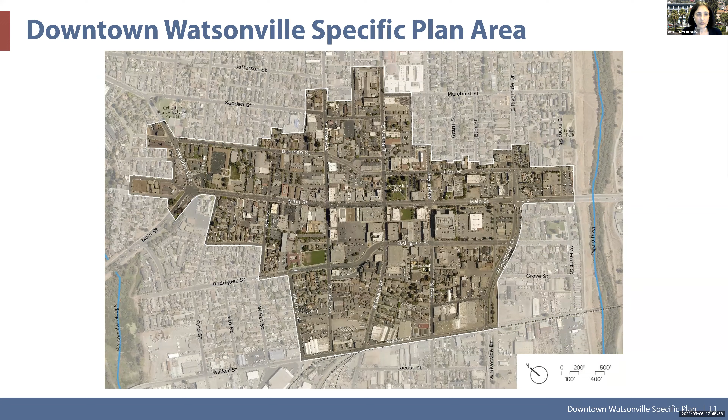Overall, the project is a 2.5-year process. We started in the fall of 2019 and really geared up last year. We've had several advisory committee meetings, and we had a community workshop last fall where we worked with you all to develop vision themes and guiding principles. These themes, which I'll show on an upcoming slide, then formed the basis for the recommendations we are presenting today. The recommendations will be refined with your input over the summer, and we'll be preparing the plan document that we'll bring back to you in the fall for your review and feedback. Then we anticipate going to the Planning Commission and City Council for review and adoption over the winter, early part of 2022.

As I mentioned, over the fall and winter we worked on vision themes and guiding principles that will guide the Downtown Watsonville Specific Plan. The themes were expansive. They included vitality, dignity, equity, preservation, safety, and innovation. With each of these themes were 8 guiding principles identified, which also have strategies associated with them. We had provided these on the city's project page for the downtown plan and asked for comments from the community. Over the earlier part of this year, we received over 100 comments, based on which we made some changes and refinements. What you see here are the final versions of the guiding principles.

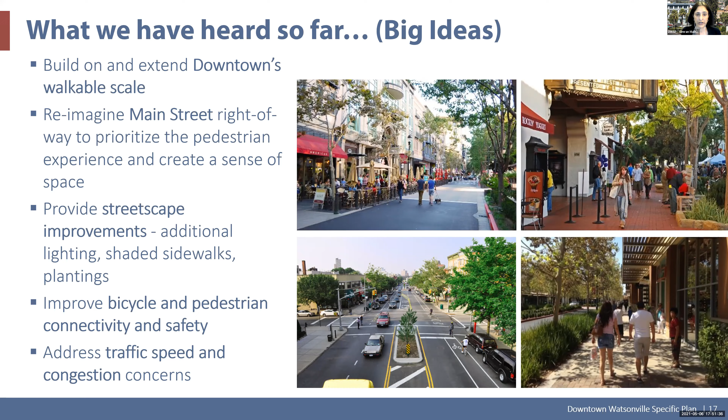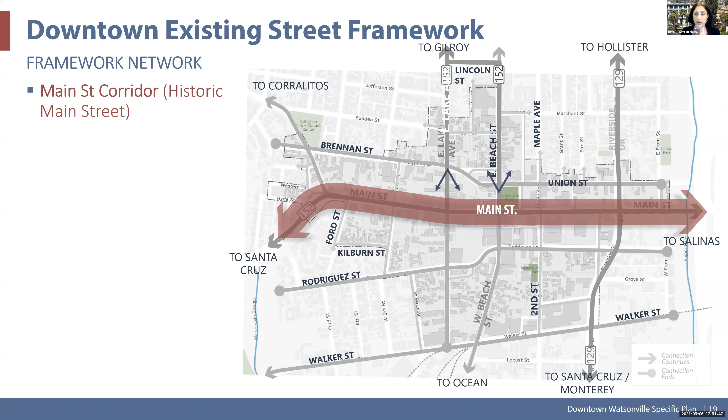So very briefly, to orient everyone on the existing street network and the recommendations for it: downtown is bisected by Main Street, the historic corridor that runs through the heart of downtown. There are several regional connectors that bisect downtown — Riverside Drive, Beach Street, Lake Avenue, and Freedom Boulevard — which connect to larger regional destinations like Hollister, Santa Cruz, Corralitos, and Monterey.

The next layer of streets is what we call crosstown connectors, including the Union-Brennan couplet, Rodriguez, as well as Walker Street. Finally, there's the fine-grained street network of local streets, which covers the rest of the street network within downtown.

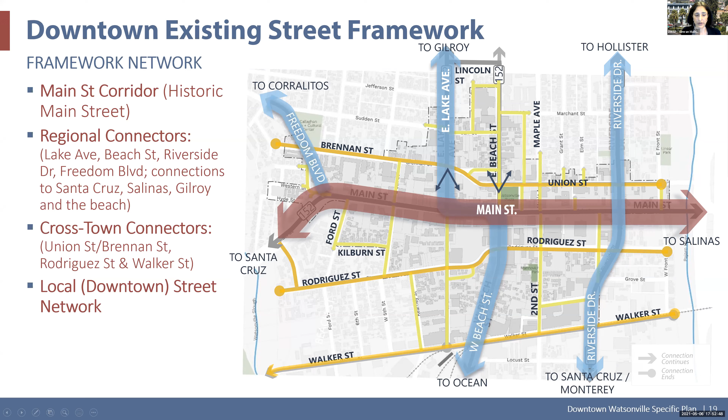There are two Caltrans routes that run through downtown: 129, which is along Riverside Drive, and the 152 couplet, which is on East Lake, East Beach, and Main Street. The fact that there's a Caltrans right-of-way within downtown has an impact on how it functions, and because of that we are making some recommendations tied to that. You'll hear more about that from both Peter and Megan later on.

The second option is to consider Lake becoming a two-way street again, letting both Lake and Beach become two-way streets, with Lake continuing as 152. That allows certain flexibility in how the street is being treated, and we'll discuss that again momentarily.

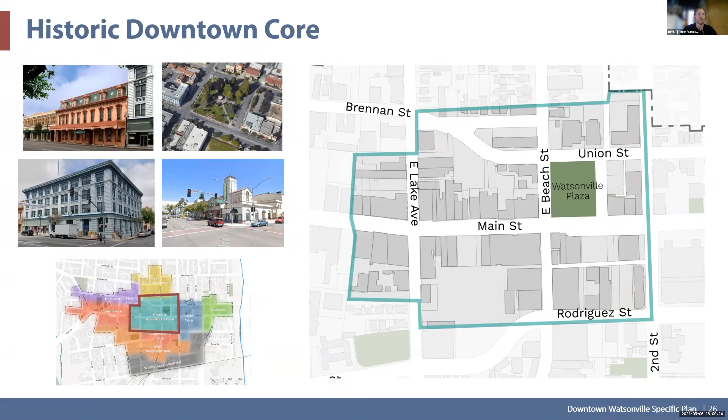So some of the placemaking priorities for the downtown core require that all ground floors of all buildings are very active. What that means is they have active uses that tend to be shop fronts, retail, things that generate human and pedestrian and customer activity, and that there's a consistent unifying streetscape throughout the downtown.

We want to encourage and enable outdoor dining to happen on the sidewalks of downtown, so that businesses are spilling out onto the sidewalks, into the streets. Maintain a continuous and active street wall in the core. Basically, creating a district that is busy and active and fun, 18 hours of the day.

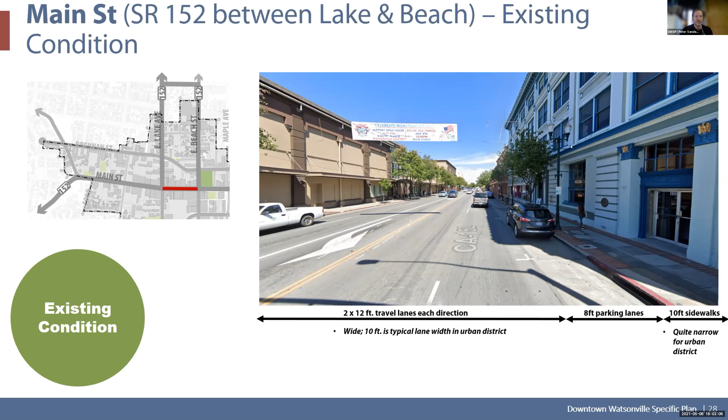So how do you do that in downtown? This is an existing conditions image of Main Street, basically at Main and Beach. As you can see, the street itself is very wide, the sidewalks are very narrow, not particularly conducive to a lot of pedestrian activity out in front of the businesses. You can kind of see where the existing parking lane is, that probably used to be a wider sidewalk. When this became a Caltrans route, the street was likely widened to add parking at the expense of the wide sidewalks that were there to support the businesses.

So, in the examples that Simran was giving, some of the alternatives that we're exploring with Caltrans in terms of potential either rerouting of the route, or on this particular stretch of Main Street, we think there's actually an opportunity to lose a lane in the northbound direction, because it's not actually part of the Caltrans loop. We'll get into the details of that later on, but what that means is a big opportunity in the core we see is there could be an opportunity to gain back some of the space that has been lost to vehicular traffic. That could happen both in short-term, more temporary types of improvements, and those could be formalized in the long term to permanent improvements.

So what we're looking at here is basically the option to reduce a lane in the northbound direction. So you'd have 2 travel lanes heading southbound, 1 heading northbound.

What that would get you would be basically widened sidewalk areas. So the colored stripes you're seeing here are what we call tactical urbanism. Basically, it's using paint and planters, removable furnishing in the street itself to basically extend the functional space of the sidewalks.

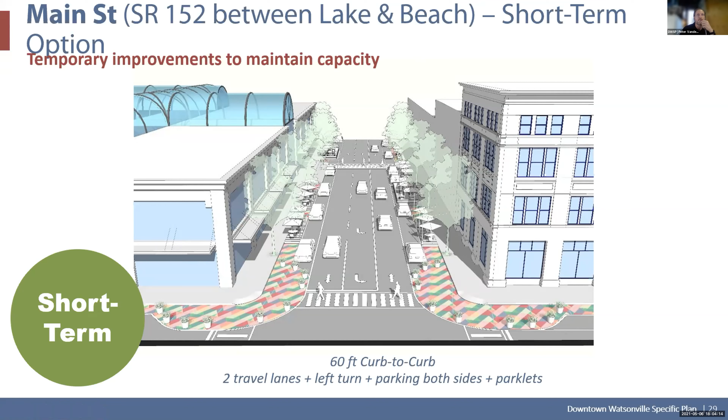And then in the long term, those could be formalized into more permanent improvements. So what you're seeing now is the actual physical moving of curbs. Rather than just using straight paint, we could have more formal and permanent landscaping. Tree planters, larger street trees. The potential, in theory, for little medianettes in the middle of the street, where you don't need left turn movements, that could lend themselves to mid-block crossings. And really, this could start to really evolve into a different sort of environment.

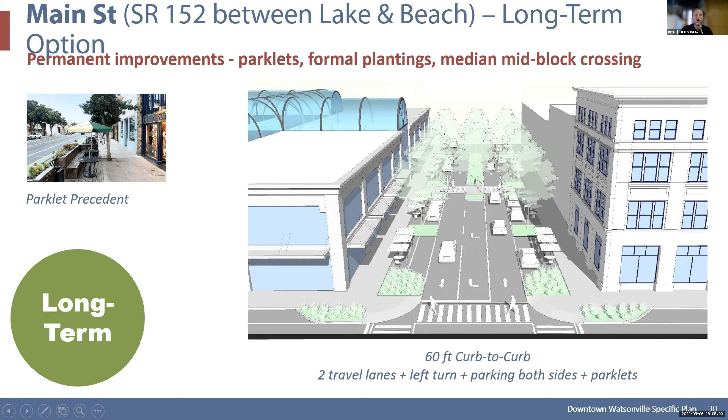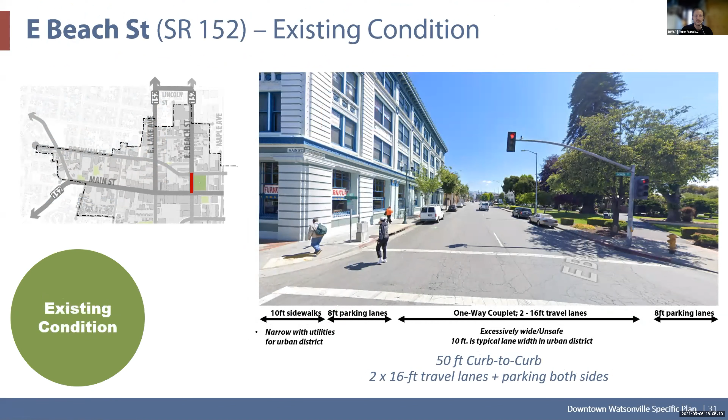Similarly, on Beach Street, I'll go through this one quickly. So this is Beach in front of the Watsonville Plaza. We would recommend the same thing in the short term. This is actually a very wide segment of Beach in front of the park, which could create an opportunity to add to the sidewalk space in front of the historic building on the north side of Beach.

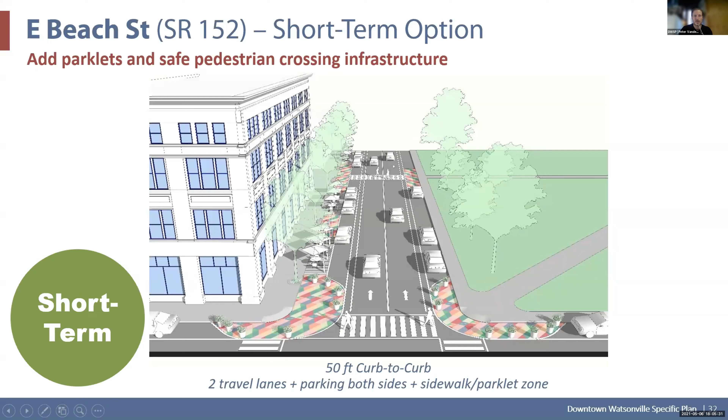And similarly, those could become formalized later with time. A lot of that would have to do with the ultimate negotiations with Caltrans and whether or not a portion of the route is relinquished. Whether or not it does, there's certainly an opportunity to take advantage of the wide width of the street here to really create a very active urban environment in front of the storefronts.

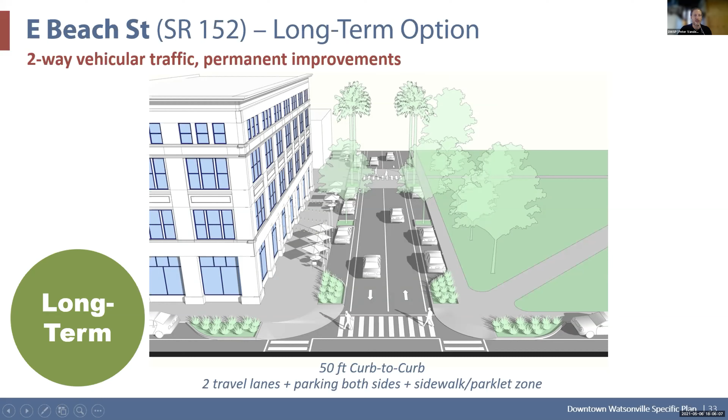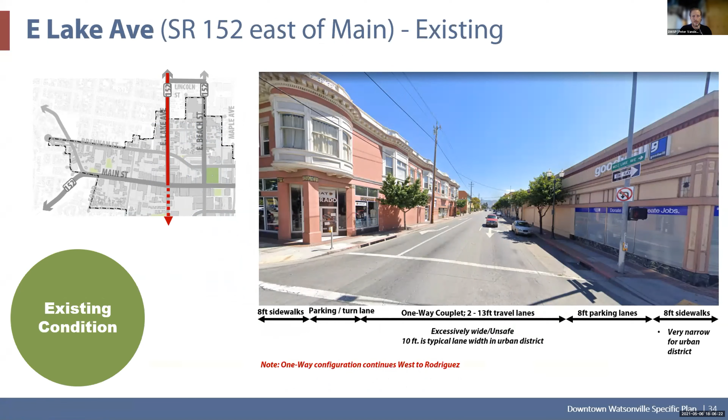Very similar on Lake Avenue. So Lake is the other part of the one-way Caltrans couplet. Again, very narrow sidewalks, fairly wide traveled way. What we're looking at here would be the possibility, and this is a short-term illustration. You see the traffic is still 2 travel lanes in one direction.

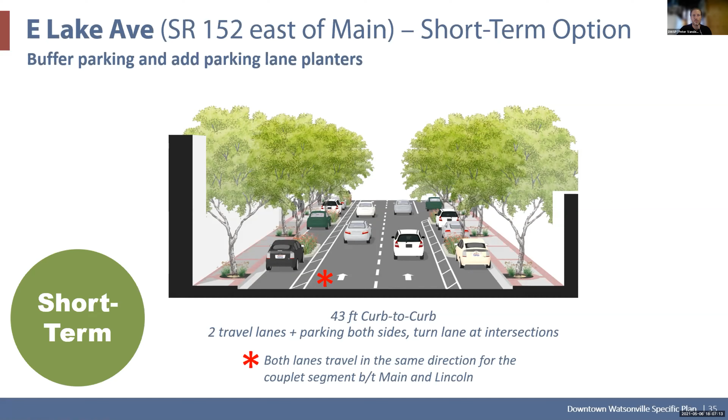But what we think you could do would be to put parking lane planters. So planters basically in the street, in the parking lane between parked cars, which would visually narrow the street. Eventually, you might replace some of the trees in the existing narrow sidewalk, again to widen the effective width of that, which would lend itself again to improve pedestrian circulation, as well as just more outdoor space in support of the adjacent businesses.

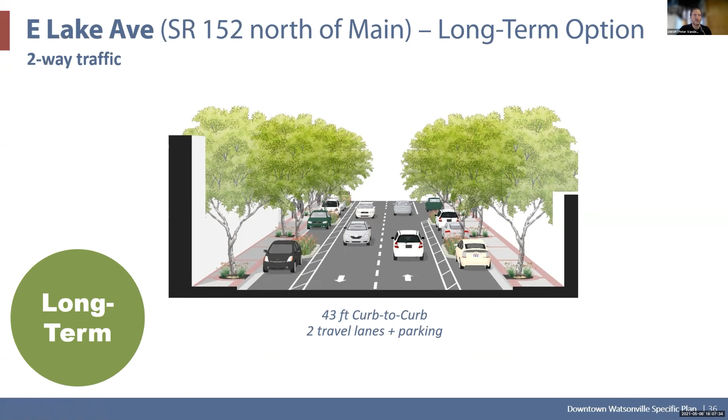And then in the long term, of course, if the Caltrans route could switch from a one-way couplet to a two-way street, it would simply mean that you'd have travel flows in each direction, and we'll look at some of the details of that a little later as well.

So now looking at some of what we think to be big opportunities within the downtown core. So what you're looking at here is the Mansion House block, on the east side of Main Street. So one of our first observations was the current alignment of Union that kind of swoops down to meet the park, creates this small, somewhat inefficient triangular shaped block on Alexander Street.

What was interesting to us when we looked at the historic photos, or a historic photo of downtown, Alexander used to terminate into Beach Street in a straight alignment, and similarly Union would have terminated into buildings lining the park. So our thought was, what if you brought back the original alignment of those crosstown streets? Neither of those streets are carrying a great deal of traffic through the city.

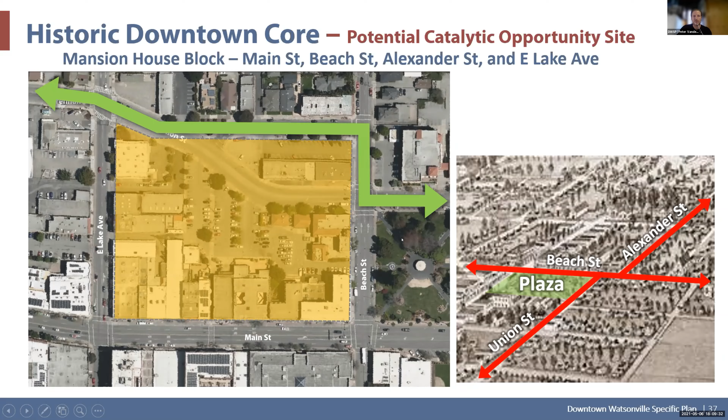So Union Street ends at Riverside, and then Brennan goes on and extends, and forgive me, I've forgotten the name of the street it extends to. But the opportunity that that would create would be a relatively large, significant new site for infill development right in the core of the downtown, that we think could both activate the Watsonville Plaza and could be an opportunity for a significant bank of shared parking and the potential to add a lot of housing right to the core of downtown.

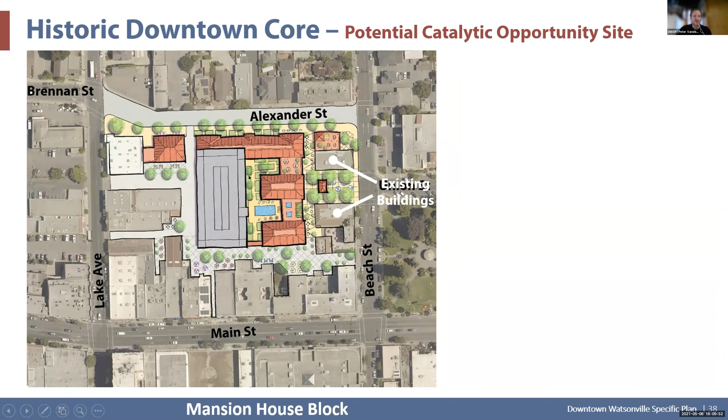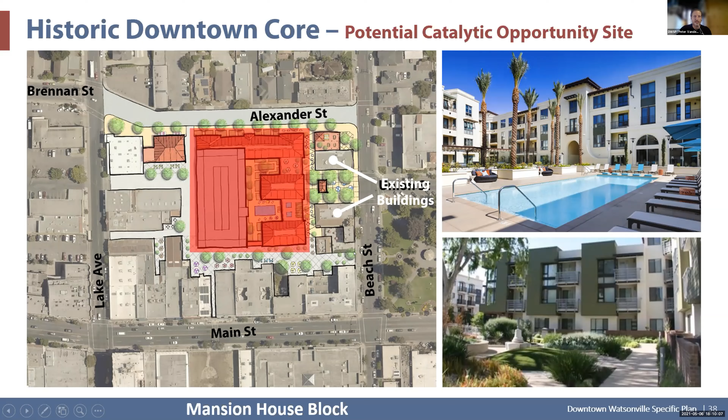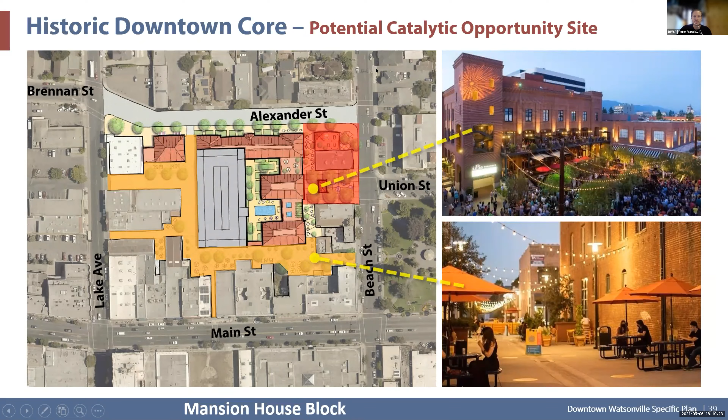So what you're looking at here is just one example of how that might work with a shared parking structure in the middle of that block, lined with new housing. The housing would likely have pool decks and podiums. It might have some upper floor terraces that would have magnificent views of the park. And the spaces within the block itself could be very active, usable paseo alley spaces, similar to the examples that we're showing here are the paseos and alleys in Old Town Pasadena.

So that's the block on the east side of Main. Now shifting down to the south side of Main—an important thing to mention is that both of these blocks right in the core of downtown are some of the larger blocks in downtown. As you move south, the network becomes quite a bit more walkable in terms of block perimeters and fenestrations through the blocks. But these two large blocks on either side of Main don't have a lot of circulation through them, so both as opportunities for new development and for extending the circulation network through these large blocks, that's an important consideration.

Just quickly here, you see the orange box that came up—that's the new Terrace development on Main Street. There is also a proposal now for a new school to develop inside of the Gottschalks building, which would be over commercial on the ground floor.

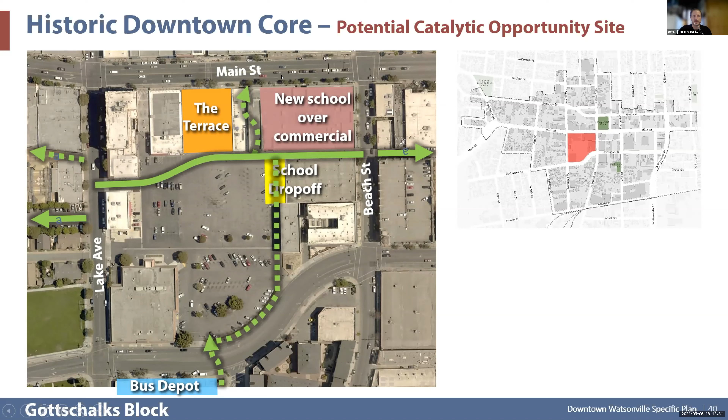Similar to the block on the east side that we just looked at, we think there could also be a long-term development opportunity, including an opportunity for shared parking in the middle of this block, with perhaps development lining Rodriguez and Lake.

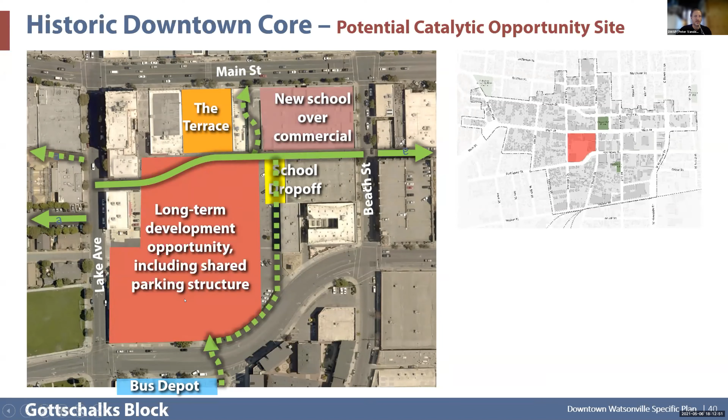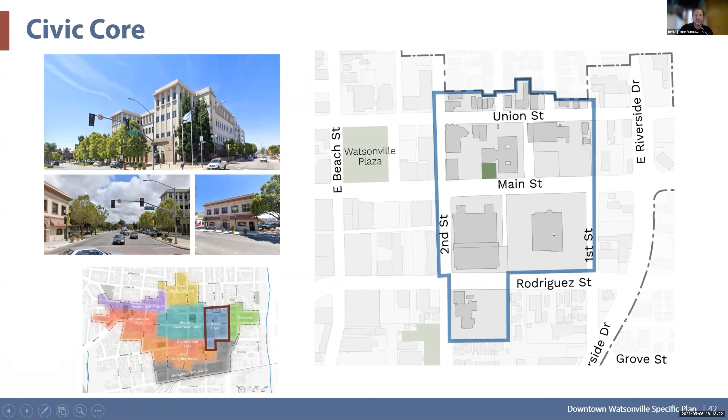So now moving over to the Civic Core. Civic Core is really an extension of the historic core to the south, anchored of course by the new Civic building at 2nd and Main, as well as the existing City Hall campus on the east side, and the post office at 1st and Main.

Some of the placemaking priorities here—there's an opportunity to redevelop the current Civic Center campus, or the current City Hall campus. We think by relocating some of the existing municipal services elsewhere—we'll show you an example we've been looking at of potentially moving the current police office to a shared facility with the fire department on Rodriguez—that would free up a lot of land very close to the downtown core that could be redeveloped either with mixed use development or housing.

Obviously continuing a consistent, unifying streetscape as an extension of downtown south towards Riverside, and an opportunity to leverage some of the underutilized parking that already exists in the existing Civic Center parking structure, in support of this as a longer term district.

So again, some specific opportunities that we've been looking at—that's the existing City Hall and Civic Campus. In the much longer term, we think there could be an opportunity to think of a future of the post office site that wouldn't be the post office.

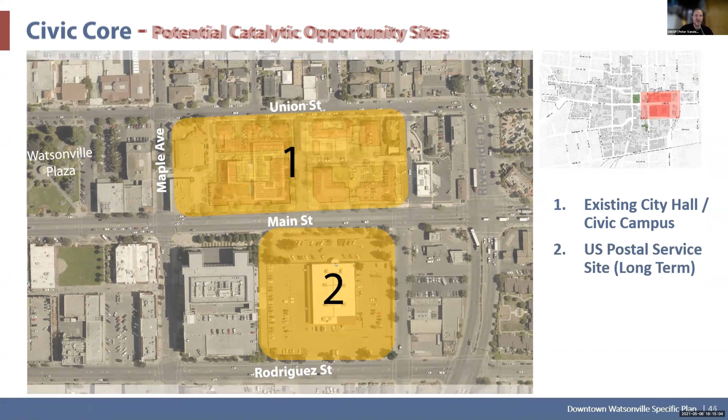If the City Hall facilities were to relocate, then what you could have on a block like that would be an extension of the Main Street character—mixed use buildings, maybe 2, 3, and 4 story buildings on Main. That could look something like that. They could look different from that.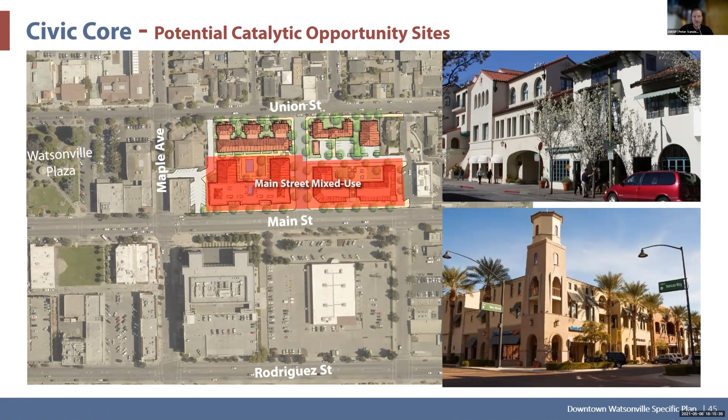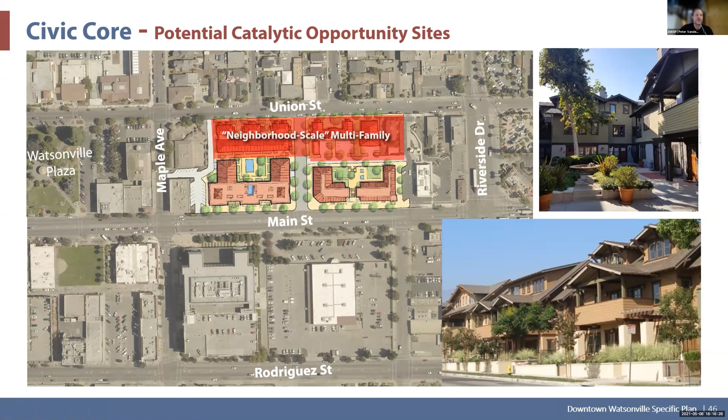And then as you transition towards Union Street, you could have infill development—what we call neighborhood scale multifamily development. The example on the left is actually from South Pasadena, basically courtyard housing that from the street just looks like big houses. In the context of this particular project, it's very similar in size and scale to the houses across the street, obviously a little larger than those on the east side of Union. This isn't a proposal, just an idea of how that would work. But the main idea would be that as you move toward the neighborhood context, development would scale down sensitive to the context there.

And then again, in the long term, if the post office were to ever go away, the main priority there would be to extend and subdivide that site so that you'd be extending the block network of downtown toward Rodriguez, getting multiple walkable urban scale blocks. If that were to happen, the intersection of First and Main would really be a significant gateway opportunity for downtown as it began to extend toward Riverside Drive.

So prominent buildings—somebody mentioned in the advisory committee meeting last week the gateway sign in Salinas, that's what you're seeing on the right there. But that would be a very visible gateway into downtown for traffic coming on Riverside Drive.

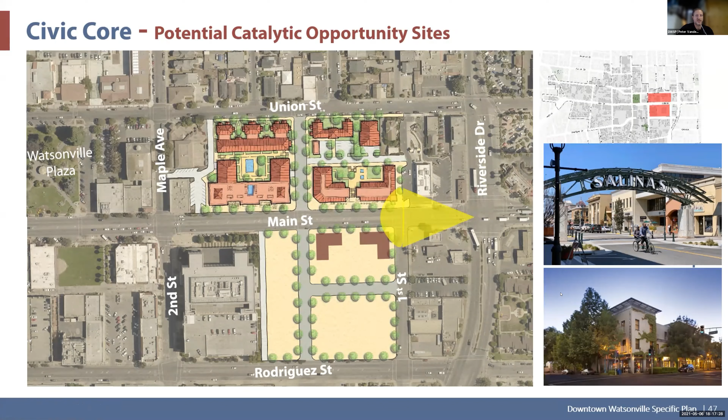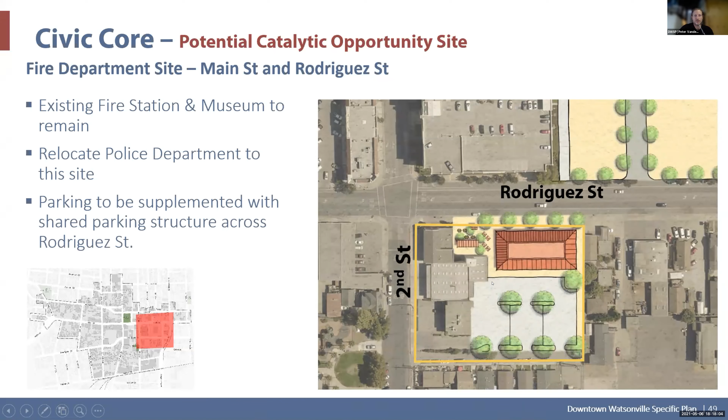One possibility for relocation of some of the municipal services would be the current fire station site on 2nd and Rodriguez. This is just an example of how a new building fronting onto Rodriguez, with a slight reconfiguration of the parking on that site, could accommodate police facilities in addition to the fire facilities that are there now.

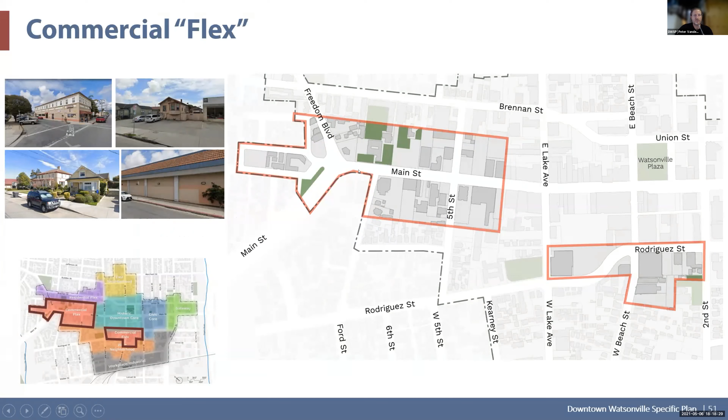Moving on to the commercial flex. Commercial flex is really similar to the Civic Core. It's really a transitional area from the downtown core environment on Main Street, extending to the north outside of town.

Some of the placemaking priorities there: the basic street network is already quite strong, and a lot of the historic building stock has been retained in this area. In some cases, we think there are opportunities for some of the buildings to either transition in use or potentially be replaced, and we're going to look at one of the opportunity sites specifically.

This site, if you're not familiar, highlighted here at Main and 5th, is the Ramos Furniture site. When we looked at this block, again like the others in the downtown core, we're always looking for ways to create additional connectivity through the block. There's an existing alley that services the parking areas for Bank of America and the Ramos Furniture site, accessed off of 5th Street.

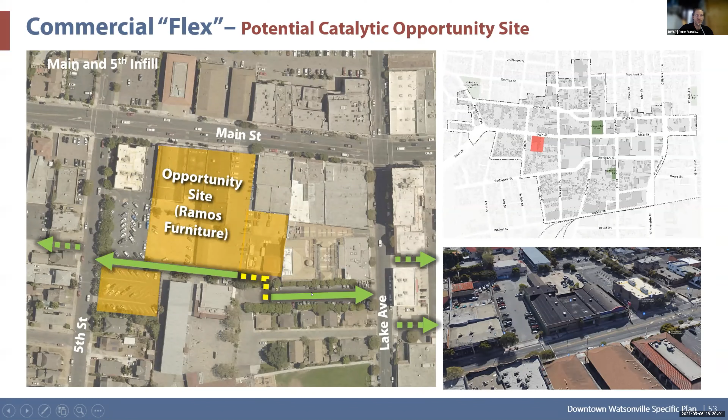There's also a city-owned parking lot that's accessed off of Lake Avenue. They're almost connected, as you can see, so the dashed yellow line simply suggests maybe there's an opportunity to connect those. That parking lot and existing alley could really function as an alley that traverses the block. There's also a very beautiful outdoor space in front of this Women and Infants Clinic that currently is not public. In the future, if that ever changed use, or if there could be some kind of joint agreement, we think there could be an opportunity to connect into that.

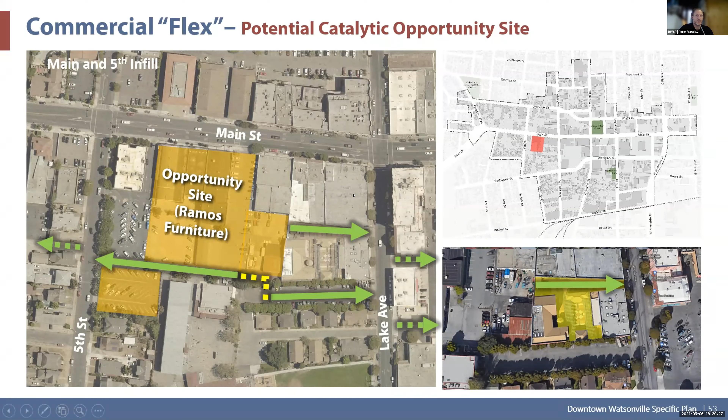Moving on, this illustration shows a new infill building on the Ramos Furniture site. It includes a pedestrian paseo that would connect beside that building to Main, and beside and behind the jiu-jitsu business there would be some kind of internal block courtyard that might connect into that existing paseo network of the Women and Infants Center.

You'll notice west of the Bank of America, on their ancillary parking lot, we understand that's underutilized, so that could be an opportunity site for neighborhood-scale multifamily development, like a quadplex or a sixplex, very simply arranged at the scale of the houses in the neighborhood on 5th Street.

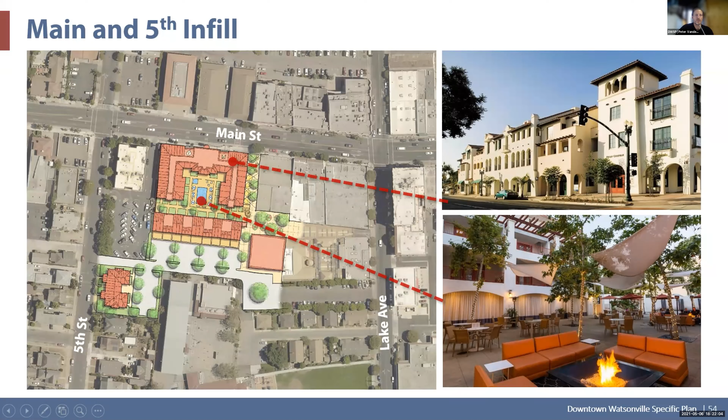Again, like the buildings we showed in the historic core, this would be a mixed-use building along Main Street that could very likely have residential courtyards above. Those courtyards could look something like this, maybe with a pool, but basically just active social spaces where a lot of people could live very close to the activity of the core of downtown.

The Gateway District is the southmost portion of Main Street. We haven't looked at any specific opportunity sites here, but really the opportunities are, as you're arriving on Main from Riverside or from the communities to the south, that there are opportunities for gateway signage elements. In the example we looked at in the Civic Core, we showed how that might work at 1st Street, but that could also happen closer to Riverside Drive.

Really the most important thing here is that you, as a traveler, experience a change of environment—not just through signage, but by seeing a change in the urban patterns, so you feel that you're entering a new environment.

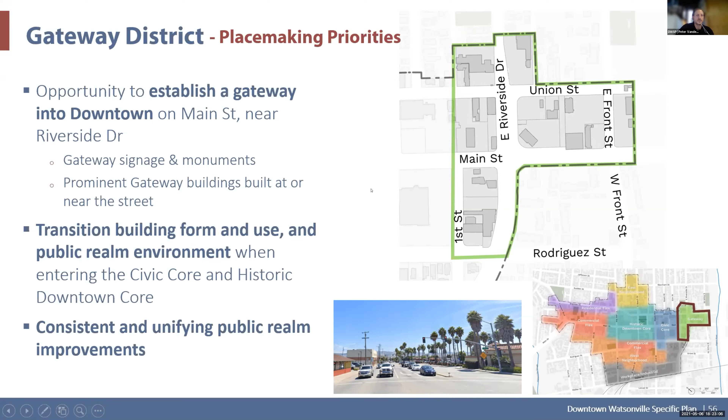This is an illustration of how some simple streetscape improvements could be made to Brennan to make it a flexible, active neighborhood street. We're illustrating what we call parklets in front of the businesses on the west side of the street, just like we showed on Main, Beach, and Lake. There are opportunities to extend the outdoor space to support those businesses on the west side.

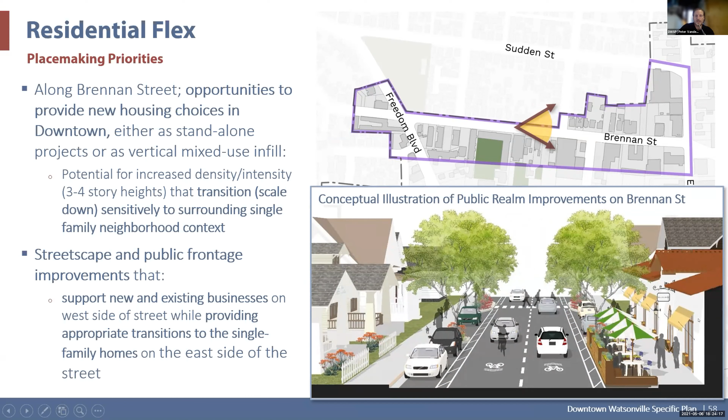Oh, I just went through those, so I'll skip ahead because I think I'm running slow.

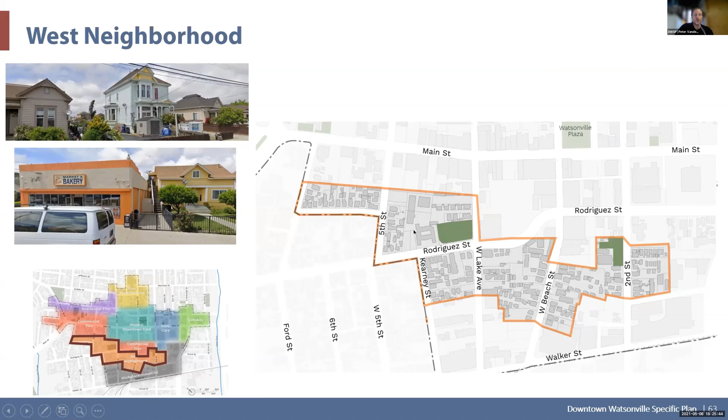Similarly, in the west neighborhood, we haven't done any specific illustrations. Here, we think there's a lot of opportunities for context-sensitive infill development. That could be residential only, neighborhood scale, multifamily. In some cases, that could include small bits of commercial, live-work, makerspace, and the like.

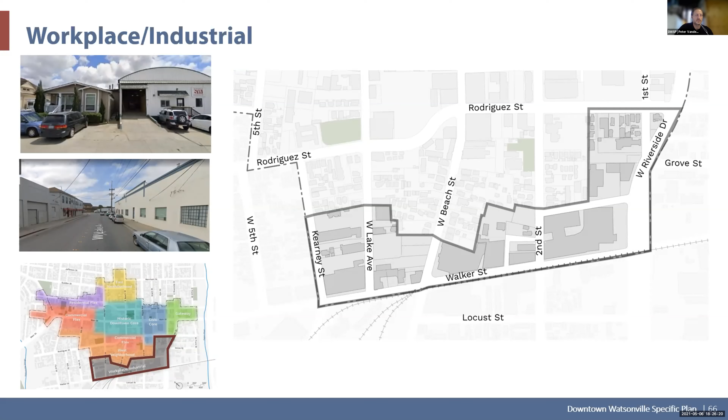And then the final character area that we're looking at is what we're calling the workplace industrial area. Really this is the area along some of the large industrial sites along Walker Street, focused around the historic train depot.

Some of our placemaking priorities here encourage and incentivize adaptive reuse of vacant and underutilized industrial sites. There's a number of large underutilized industrial sites, some of which are vacant, some of which are just storage yards for materials or trailers, things like that.

And we really think that this part of town could be a very unique, cool part of downtown Watsonville, similar to the Funk Zone in Santa Barbara or the Arts District in downtown Los Angeles, where it could be a concentration of incubator space, creative offices, makerspace, art galleries, breweries, coffee roasters—things that tread the line between industrial and in-town. That wouldn't necessarily belong on Main Street, but could very comfortably find a place in this part of town and attract certain user types and residents as well.

We think there could be an opportunity for housing in this area as well. So the main idea then would be to really concentrate a critical mass of activity around the historic depot site. And we're going to show you an example of what that could look like.

So the basic idea would be to take advantage of the industrial building stock that you have in this area and find ways to thread an active public realm network through it, as some of these uses may evolve over time. Really, you're creating an incidental open space network by converting some existing parking lots into outdoor dining terraces and plazas, and by making targeted improvements to the street and public realm.

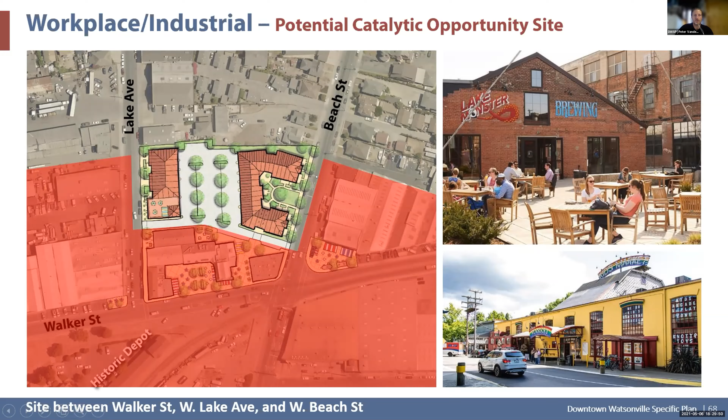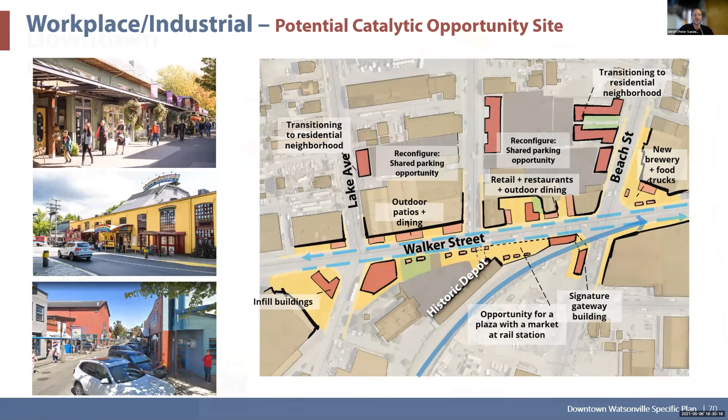So zooming out of that specific illustration, this is just to show how over time, if you get a critical mass of activity around the historic depot on Walker, this area could really start to evolve into a very active district. I think that's all I have.

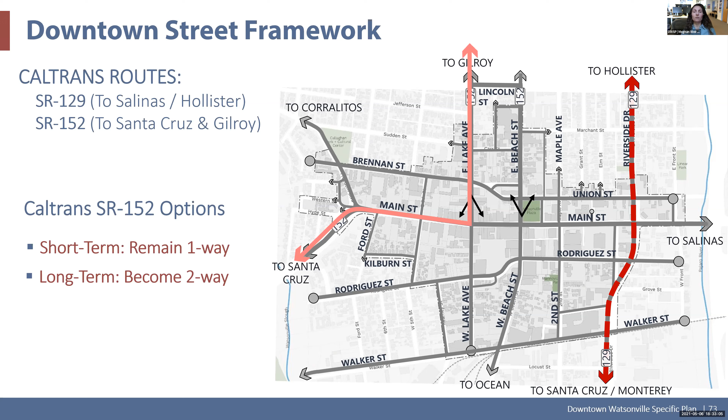So that's what we have in mind as we're going through some of these potential reconfigurations in the next few slides.

Starting with Main Street, as Peter discussed earlier, the existing Main Street is fairly wide, but has narrow sidewalks for a downtown district. So we're looking at opportunities to reconfigure where the additional vehicle lanes might not be necessary, especially the portion that's not part of that Caltrans loop.

So Caltrans, from Lake onto Main, going north on Main is a Caltrans facility, and going south on Main between Lake and Beach to connect to Beach right now, but that northbound segment up until Lake is not part of that Caltrans configuration. So there are opportunities to reclaim some of that space for pedestrians and businesses.

Just a reminder of what Peter showed earlier, on the left, we've got the short-term option, which is a slight reduction in the vehicle right-of-way with that extra lane space that's not necessary for efficient traffic operations, and expanding the pedestrian realm with parklets. On the right, showing the longer term option, how you can formalize some of those short-term design changes and build in more landscape and pedestrian connections to really emphasize the public realm and make it really feel like an outdoor room, as Peter was saying. Next slide.

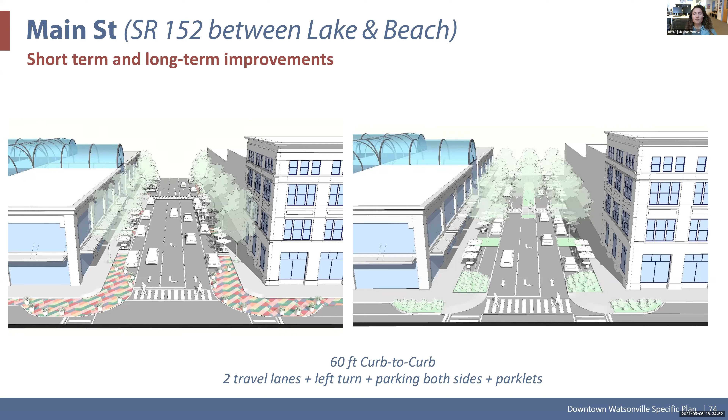This next example, also a reminder of what we already saw a little bit earlier in the presentation on Beach Street. Existing Beach Street is part of the one-way couplet with two very wide eastbound lanes, which favors trucks and high speeds over pedestrians and other people who are moving around without a car. So these are a couple of options for how that could be reconfigured.

Just in the short term on the left, simply could narrow the vehicle lanes that are so wide right now, add parklets, and shorten the pedestrian crossing distances using paint and planters. In that way, help to calm traffic and make the pedestrian environment on those sidewalks and the plaza more inviting and more comfortable. In the long term, shown on the right, there's an opportunity to perhaps even revisit...

The Caltrans Route 152 configuration and the one-way couplet loop with Lake, and reconfigure Beach and Lake both into two-way streets. Similar to Main, bring the painted pedestrian areas and parklets and planters into something more permanent with landscaping and more formal crossings.

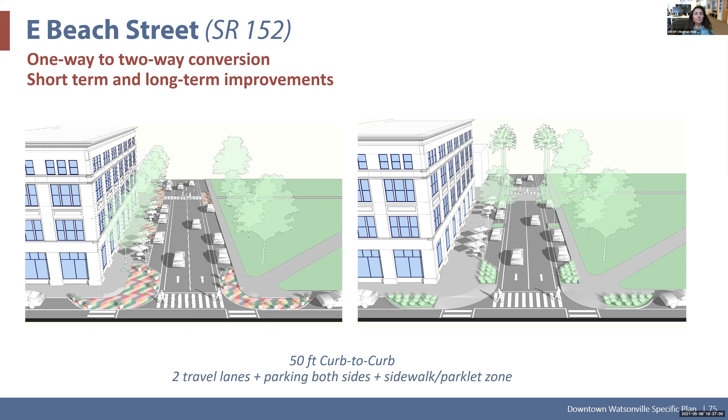And this is showing Lake Street. Again, this is a review since we got to see this already in the context of the downtown core. Just as a reminder, the way Lake is set up right now, similar to Beach, it is part of the one-way couplet. It has very wide travel lanes and there's some parking and narrow sidewalks.

These two images illustrate that over on the left in the short term, could use similar traffic calming strategies as on Main and Beach with narrower vehicle lanes and a buffer between parked cars and moving cars to help improve the pedestrian environment, make it easier for people who are parking on the street, and take some of that on-street space for planters to help visually reinforce the downtown setting and the pedestrian experience.

So all of this can be done even if Lake remains a one-way, two-lane street as part of the Caltrans couplet and key piece of 152. And those kinds of improvements could be made more long-term and more formal with additional planting and pedestrian treatments at crossings.

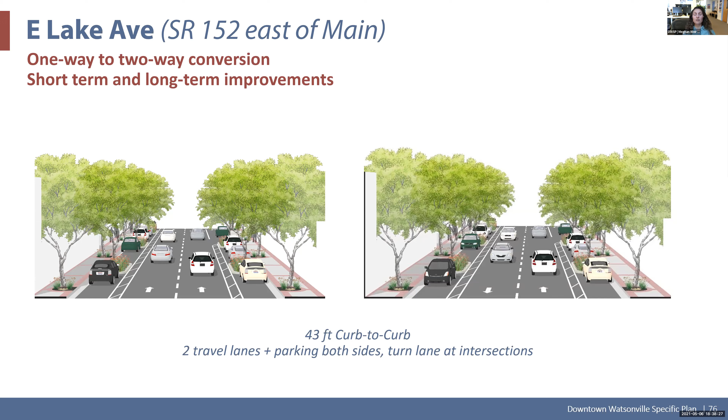Over on the right side, you can see a potential long-term scenario where Lake could become a two-way street and the Caltrans traffic would be consolidated onto Lake, no longer routing eastbound traffic onto Beach. Then it might be necessary to have left turn pockets at the intersections, and there would have to be more analysis of other access needs along this corridor outside the intersections to figure out if that has to continue through the blocks for side streets or driveways.

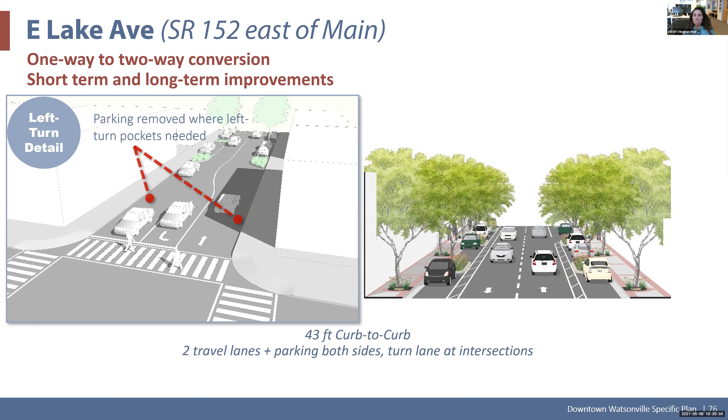But you can see there's an opportunity simply to remove parking or to consolidate parking to one side where left turn pockets are needed, and make sure there's room for all the turning movements and also for that through traffic that relies on the Caltrans route. In that way, the street can function more like a downtown street while still serving that Caltrans need.

On this slide, again some familiar imagery, thinking about other downtown and neighborhood streets outside those primary arterial corridors, specifically Brennan and Union, and Maple and Second, which run parallel to Main Street and east-west, and Beach outside the couplet, especially to the west of Main. These streets, among others, tie into the downtown and surrounding residential neighborhoods, and each has a slightly different mix of overall dimensions, on-street parking, and civic and commercial uses.

So the design recommendations would vary from street to street and maybe even from block to block in some cases. We can talk a little bit about how that might fit in with the bicycle network in just a few more slides. But the overall approach to these streets is to address pedestrian needs, maintain residential parking, and identify opportunities for off-street commercial parking.

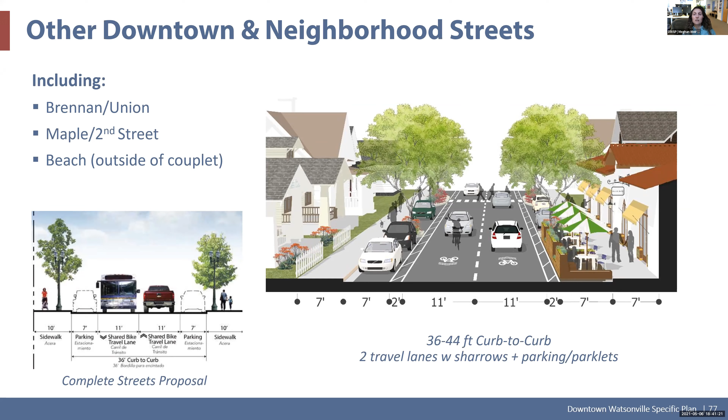And with those key right-of-way configuration and framework needs in mind, build in traffic calming designs into the streetscape so the streets can also serve as meaningful bike connections and bring an all ages and abilities network into the downtown core. So like I said, we'll talk a little more about that in the next set of slides.

So the last key street we wanted to call out in the downtown network before switching over to the bike map is Walker. As it exists right now, it's an important, primary truck route, and the right-of-way is really dominated by truck access, especially serving the industrial uses in place right now. There are very narrow sidewalks and bike lanes.

In the long term, Walker has already been identified as part of the Monterey Bay Sanctuary Scenic Trail. The emphasis here is to note that Walker really presents an opportunity to expand a continuous regional network, and the specific design could change to dedicate more space to pedestrians and bikes. For example, depending on development along Walker, there may be opportunities to accommodate parking off street, so there's more right-of-way to dedicate to bike lanes or more separated bike lanes.

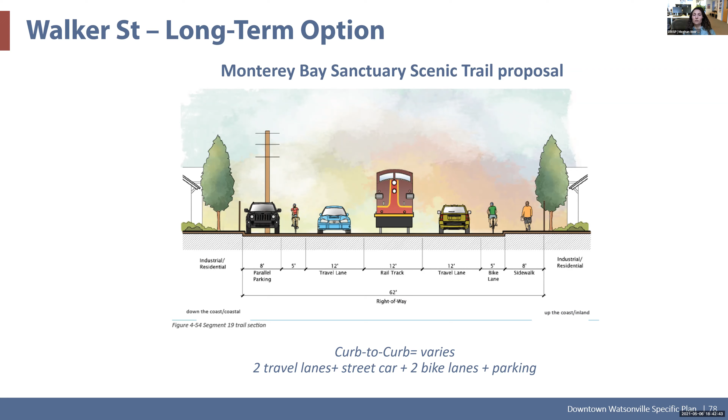So there's lots of possibilities along here that could be designed specifically to respond to the development that Peter was just describing.

So the next few slides, I'll talk about the bike network and bike facilities and how we can fit bike facilities and connect to the rest of the citywide and regional network in downtown. I'm going through this fairly quickly. The last few slides were a bit of a review, so I'll slow down here to make sure we're covering all the basics. This is definitely something we can talk about more in the discussion afterwards.

So this is a quick primer and visual reminder about some of the bike route types and labeling conventions that we use. Moving counterclockwise from the top left corner, in almost numerical order: Class 1 bike routes are bike paths that are separated multi-use paths. Right below that, we've got Class 2 bike routes, or bike lanes, which refers to an on-street lane of varying widths, sometimes with a painted buffer. To the right of that is a Class 4 bike lane and/or separated bikeway.

Or cycle track sometimes, is how they're referred to. Those are more substantially separated bike lanes. Sometimes they're grade separated, meaning the same level as the sidewalk instead of the street, or they can be buffered by parked cars, as you can see in the photo here, or by planters and other kinds of vertical separations.

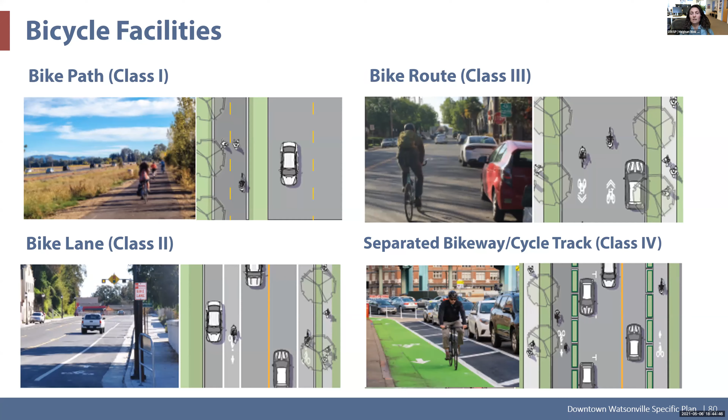And then finally, moving back up to the top right corner here, we've got class 3, which refers to a bike route that comes in many forms. Most simply, it means it's a designated bike route that shares the right of way with vehicles. There are a lot of different ways to make that part of the bike network that I'll talk about in the next few slides.

So next slide. This map, once it's loaded on the screen, here we go, shows the existing bike network.

I want to call out a few details here. The solid green lines on this map are designated class 3, which means shared right of way, as I just mentioned, but they're not marked with on-street signage or pavement markings. The dashed green line indicates streets that have sharrows, which are pavement markings intended to serve as a reminder to both people riding bikes and people driving that the lane is meant to be shared between both cars and bikes.

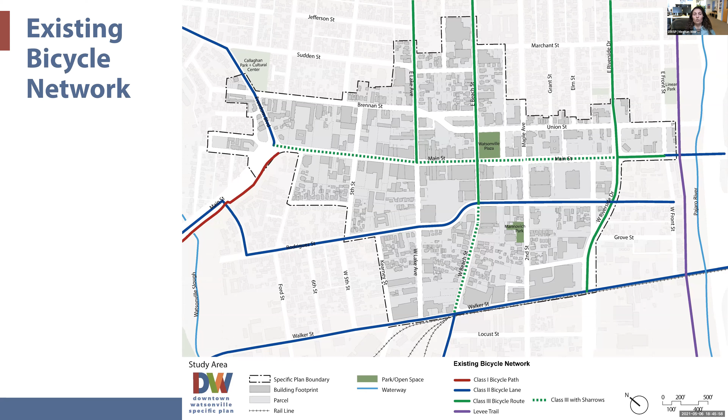A key takeaway here is that the existing network is mostly east-west bike lanes on Walker and Rodriguez, or unmarked shared right-of-way on high-speed, high-volume streets that are also part of the Caltrans routes. So there's a lot of opportunity here to adjust the bike network and make it feel more inviting and comfortable for people of all ages and abilities.

Brennan and Union are too narrow and include some residential parking, which we assume is less flexible than commercial parking, as a general approach to thinking about street right of way and how space is allocated. So we don't consider Brennan and Union to be wide enough to accommodate a designated class 2 bike lane, or a painted bike lane that's not a shared right of way.

However, those are narrower neighborhood streets and can serve as the east-west route north of Main with traffic calming designs that would reinforce low speeds and volumes, and also intersection treatments to really support bike access across the main north-south arterials like Main and like Lake and Beach rather. So even without dedicated right of way on those streets, we do think there are some good opportunities to make that a meaningful part of the bicycle network.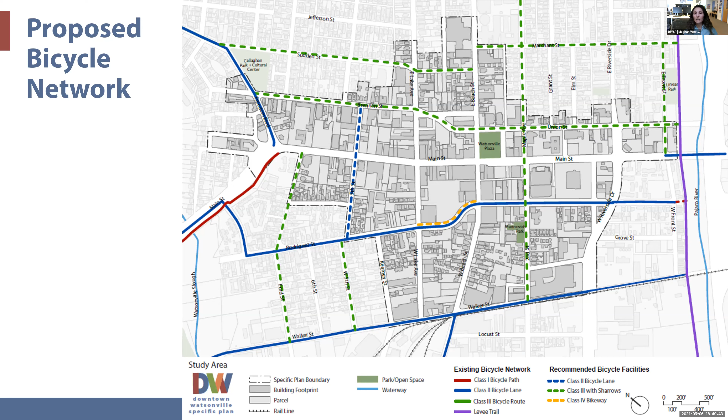The final slide shows some examples of how we can achieve enhanced class 3, low volume and low speed streets. This is just a couple of examples. There are lots of different design options to help keep traffic calm on streets that are intended to be used as part of the bike network.

For example, narrowing the pedestrian crossing at intersections and generally making sure that the street is not wider than it needs to be to accommodate vehicle traffic helps to calm traffic and prevent people from speeding through intersections too quickly. There are also opportunities to put small right-of-way narrowing designs into the street at mid-block that help remind drivers to slow down and be aware of the space they're taking up.

So those are the kinds of designs that could be sprinkled in on some of those side streets to support the east-west and north-south connections on that proposed bike network. And that is it for my slides.

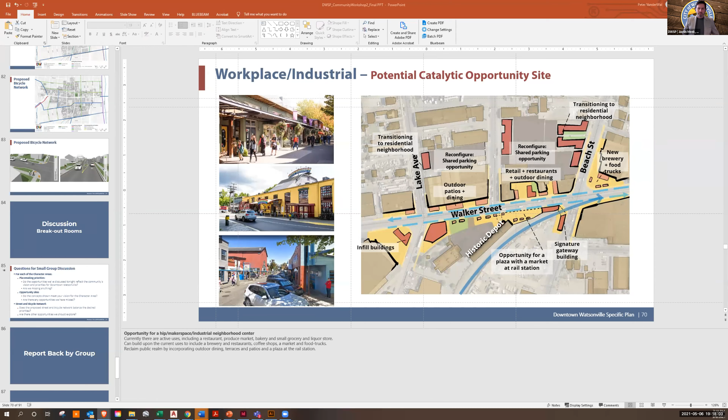Thank you very much. I appreciate the comments on providing a pedestrian network that serves everyone and doesn't create barriers, and also the comments on widening sidewalks and making it a more inviting and walker-friendly place in general. So is there any other comments that people want to share?

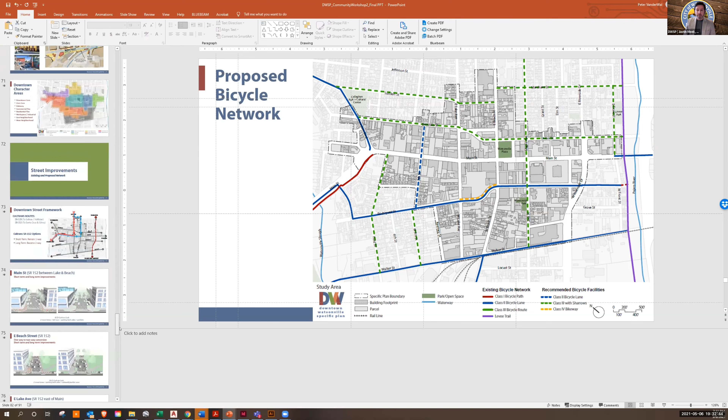No, just two comments. One, beach - most of Beach, particularly as you head past the highways, is of course in the county. And I agree that's in dire need of improvement, but would have to be through the county. And likewise, most of Main Street is a Caltrans facility. Once you, as shown here in the red and blue, that's all Caltrans. And so as you round the corner at Freedom and continue down toward Lake and then Beach, that's part of State Route 152. And the blue portion is the portion that's a couplet where it's one way as you go up Beach to Lincoln and then Lake.

So any roadway improvements must go through Caltrans. Staff has been in communication with our counterparts at the state to talk through potential improvements, all of which we've shared with them to get their feedback and make sure they're on board or at least wouldn't be opposed to what we're talking about. So far those conversations have been positive. You can imagine that to turn this into a capital improvement project with Caltrans is a long process. But at the same time, we're wanting to check with our community and then communicate that back with the state - this is what our preferences are, please work with us. And if in doing so, potentially a lot of these improvements could be funded through state funding rather than local general funds or other funding.

Nice. Okay, thank you.

Wonderful. All right, we got less than 5 minutes. We got probably time for one or two more questions or comments on any of the topics we talked about, whether it's the transportation networks or the infill sites, the overall character areas, and where are areas we're thinking there might be opportunity for infill, or the type of activities that could occur, whether we're talking about the Civic Core or some of the surrounding areas. Just open up to your thoughts.

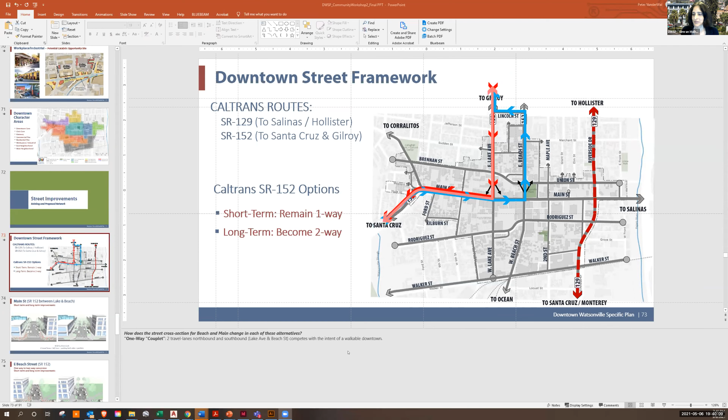I hope there were fruitful discussions in all the groups - we'd love to hear some report backs. Who was group 1, who was the leader? I would say that was Peter and myself. We seemingly just remained in the main group without going into a breakout group, but we had our own little subset.

Peter, feel free, but I think the main things we talked about were around the road network - first looking at Walker Street, some of the potential infill development around there, and thinking through the possible connection and reactivation of the rail line and a train station there, or perhaps somewhere else. Then building off that conversation, looking at the fact that Walker Street isn't accessible - now there's no sidewalks - and noting other parts of downtown and nearby also aren't accessible, transitioning to conversation about overall walkability and focusing on Main Street. But then having more conversation looking at the bike network as well and providing connections east-west.